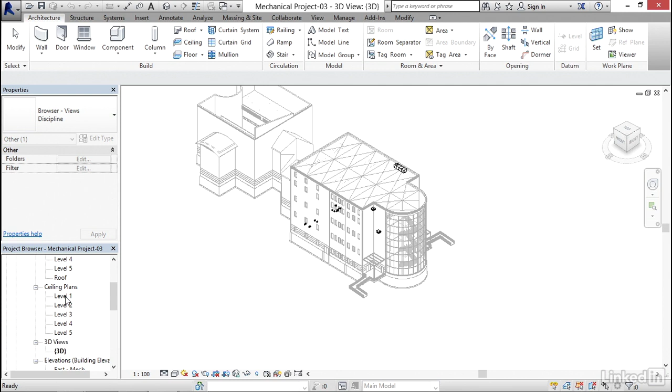I'm going to sprinkle some diffusers in this area here. It's going to be in one zone, so I'm going to come into here. I'm going to put the harder one in first. I want to go to the Systems tab, and now I want to click on Air Terminal.

I'm going to click the drop down here, and I want to grab M Supply Diffuser 600 by 600 face, 300 connection. Now for my offset, I want to go 2438. Now we can see it.

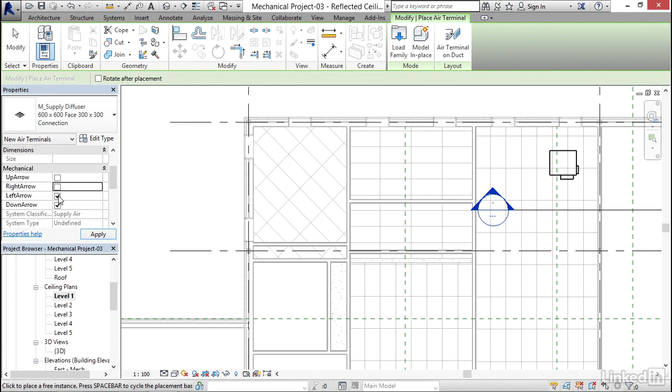For mechanical settings, I'm going to turn off my flow arrows. Some people like to show them, some don't. I'm going to turn them off.

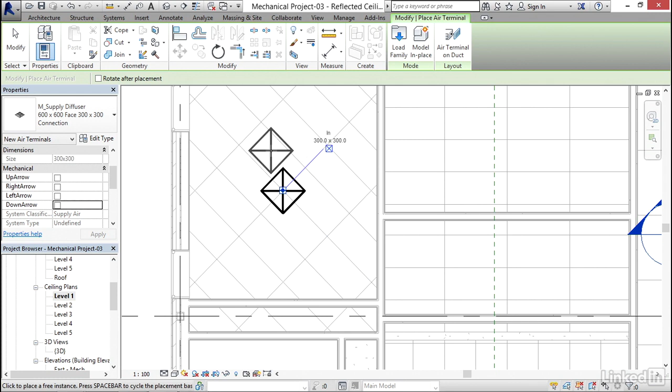Now what I'm going to do is hover over one of these lines, and hit my space bar, and it's going to flip it. Now what I'm going to do is basically stick it right here. I'm going to hit escape a couple times. I knew it would take a second to turn those arrows off.

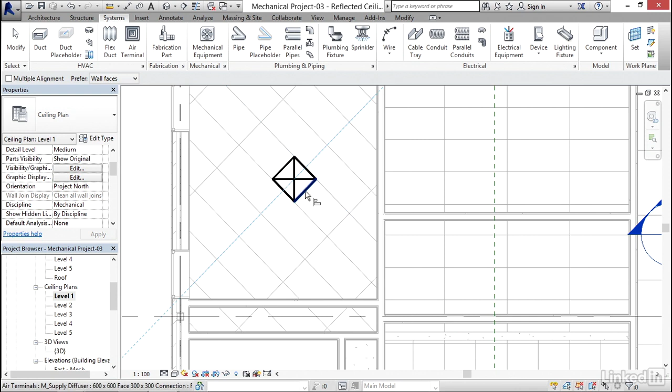Now what I'm going to do is use that align command again. It's pretty handy. I'm going to type AL for align. I'm going to select this line here, grab it here. Don't lock it. I'm going to click this line here, and select that line there, right in the middle of the room. I'm going to select it.

I'm going to hit my copy button. Now I'm going to pick a point in this corner here, and copy it right down to here. Now I'm going to hit escape a couple times.

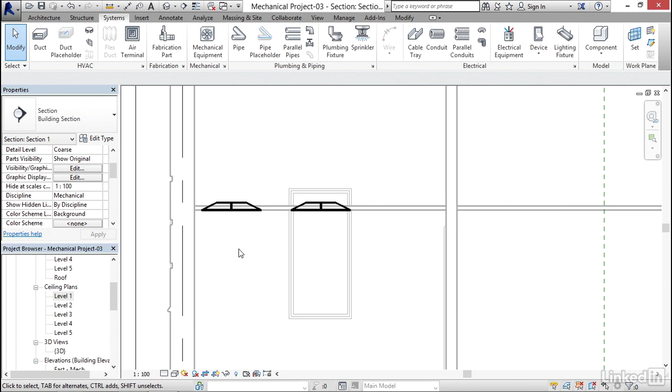I'm going to select my section marker, and pull it all the way down, and make sure that my extents go all the way down with it. I'm going to double click on it. I'm going to zoom in here, and verify that those are sitting nicely in our ceiling. I'm going to hit Control Tab and go back down.

Another thing I'd like to do, which is kind of neat, is go to Annotate, go to Spot Elevation. And if I hover over my ceiling, I can see what the elevation is, and it's at 2438. Luckily, that's what I put my diffusers in at.

I'm going to hit escape a couple times. I'm going to select one of these diffusers, right click, and create similar.

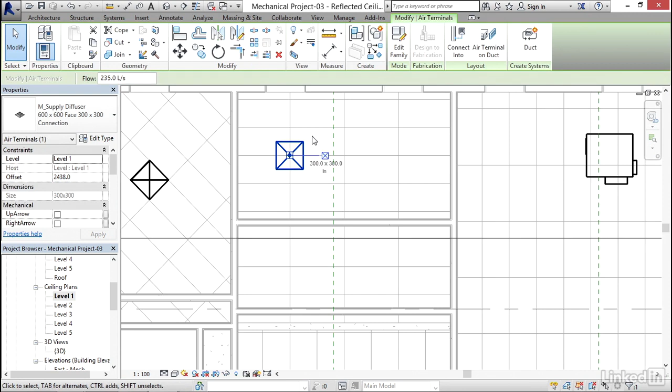Now what I'm going to do is place one over into here. So I'm going to select this. It's a pain they have to keep moving them, but I put one in, and then I can move them around. So I'm going to select it, move it up, then move it over.

I'm going to select it, click copy, and copy it down to here. I'm going to select this one here, click copy, and copy it down to this room.

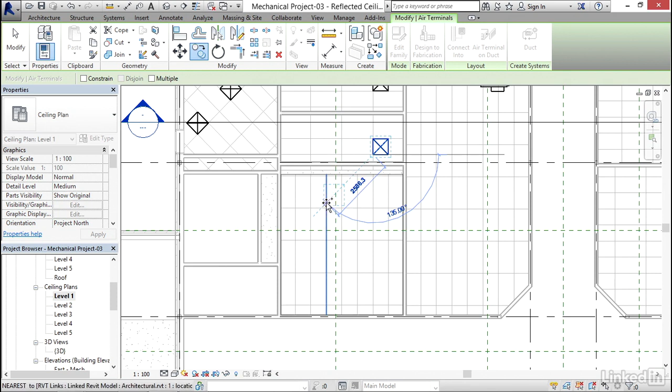I'm going to select this one here, click copy, and copy it down into here. Obviously, we're going to have a bunch here.

So I'm going to pick a point here, select it, click copy. This time I'm going to go multiple, pick a point here to here, and copy it down here, over to here. I think we get the point.

So I'm going to load up this area with some air terminals, and this will be pretty good. Go to a 3D view, make sure everything's in our ceiling. I'm going to go back down to Level 1 ceiling plan, hit Spot Elevation, just to make sure that all of our ceilings are at the right spot.

Now, these are not hosted to a ceiling, and there's a reason for that. Hosting lights, I have no problem with doing that. We're going to connect these via ductwork into this VAV. This VAV, of course, is going to be connected to our rooftop unit.

Now, if the architect moves the ceilings way up or way down, what happens is when we open our model up or sync our model, basically it's going to break all of our connections. I would rather have my diffusers floating in the air than have all those errors. So that's why I like to put my diffusers as unhosted elements.